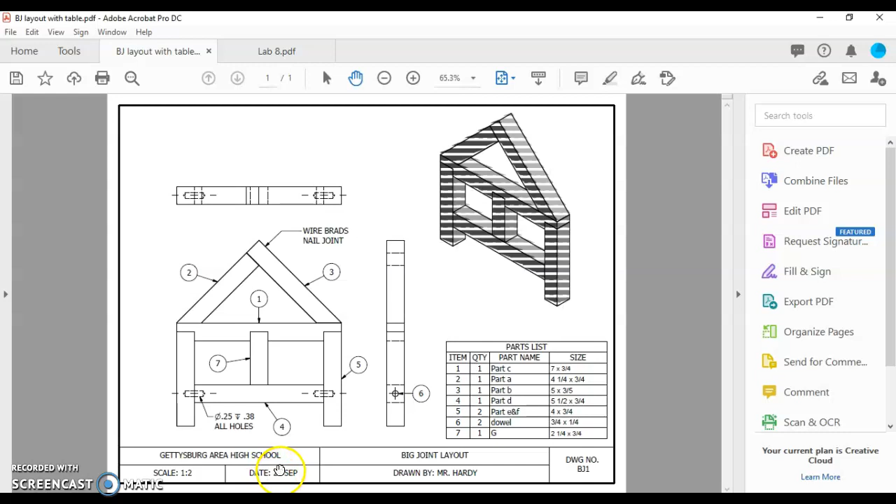So let's launch AutoCAD. Bring up your bird house, bring up your size A title block template, and get into the model space to begin the drawing. I'm going to just draw next to this one and duplicate what we see over here.

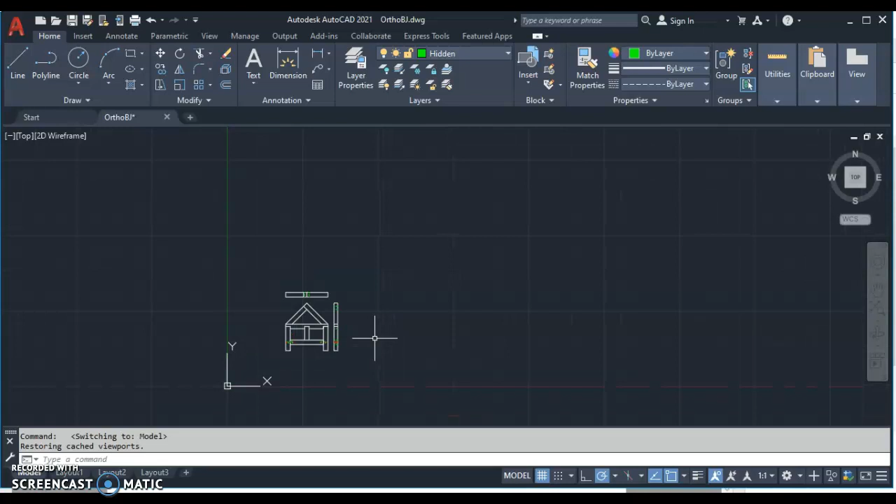There are a couple ways of approaching this problem. You find the tools that you are most comfortable with. You can either draw polygons or you can draw lines, whichever one works for you. It is important, though, that you use the correct measurements and you don't just simply eyeball this on the grid on the screen here. As I zoom in, that grid is going to change in perspective and size, and it's important that when I draw my objects, that they are the exact dimensions that they need to be.

So let's start by drawing with lines. Now I want to start in the object visible layer, so we'll check the object viz layer. We're going to pick the line tool here, and I'm just going to start drawing a point here.

And I know that this outside part is 4 inches high, so I click, I'll pull up, I'll type the number 4. Okay, I'll come across - I know that's 3/4, 0.75. I'll come back down the number 4.

Now I'm going to just show you a couple of things I do here. There's a little projection I can use, or I can type in the number 4. So all I had done there was moused over that endpoint and clicked.

And so I have my first part, and that was drawn with lines. Alternatively, I can also draw with a rectangle, and I'll show you how to do that on the other side. Let's put a 7-inch rectangle in right here, and I'll show you how to do a little bit of moving.

So we're going to choose a rectangle tool, and I'm going to specify that point to be right here, and I'm going to actually pull this down. This part is going to be 7 long. I'll hit tab and make it 0.75 tall. This drew a polygon here. It's not exactly placed properly, but it is in a general area where I can work with.

Now let's actually move this polygon. So I'm going to use the move tool. Select the move tool up here - it says select my objects. Let's choose that polygon. I'll hit enter, and it says specify base point. Well, I'll use the geometric center. I could use any point on here, but I'm going to select that geometric center, and I know that this has to go straight up a distance of 3/8, which happens to be halfway up there.

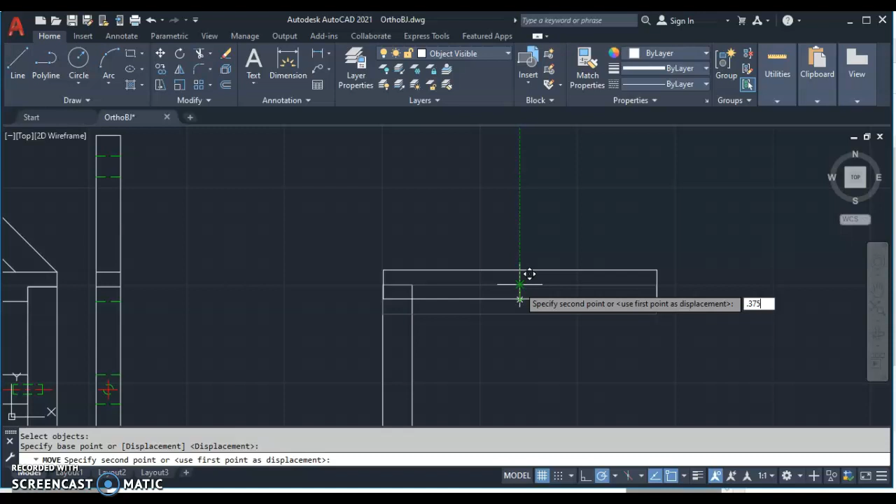And I don't know if you guys can see that, but it kind of locks at the top exactly. Now I could type in the 0.375 - you also see it appear on the screen out there, but we can type in 0.375, and we know we have that exact movement, or I could accept the lock. And I hit enter, and there it is. That has moved in. How do I clean this up here?

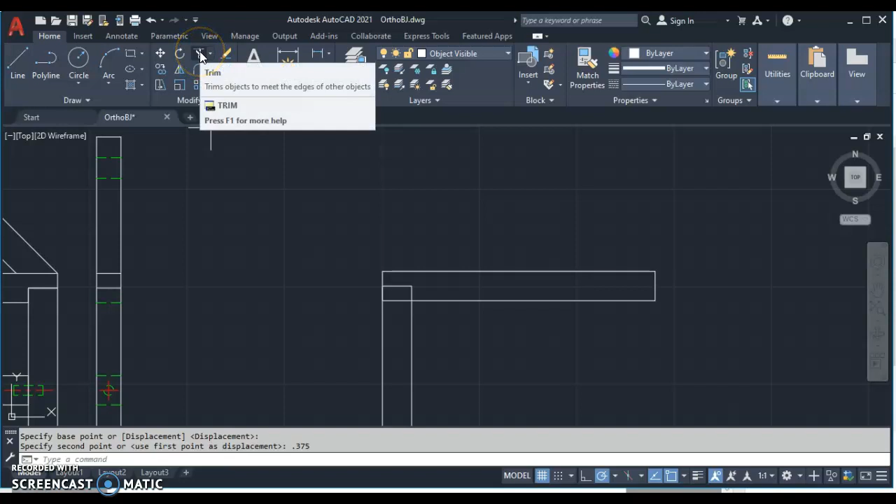This is going to be our little rabbet cutout there, and I need to trim this out of here. Very simple solution - we're going to use the trim tool, and we can trim this back. So in the modify menu, there's a pair of scissors, that's the trim tool. It says select the objects you want to trim. So you see, as I mouse over here, it trims out or cuts away the things that I want to cut back. So I'm going to trim those 2 lines out of there, and then I hit escape. And there's my part - very simple way of doing it using a polygon tool.

And you may find that the polygon tool is a much faster way of doing this. We can do the same thing on this side. In fact, you can use the polygon tool on this side, or if you like, you can mirror these lines right here.

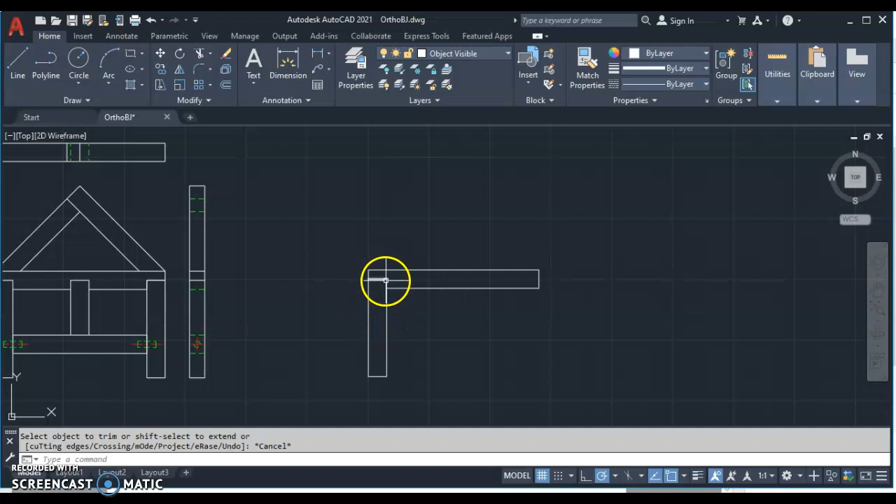So let's show you how mirror works. Pretty cool tool. I'm going to take this line, and this line, and this line, and this line. We're selecting those lines, and we're going to go up here to modify.

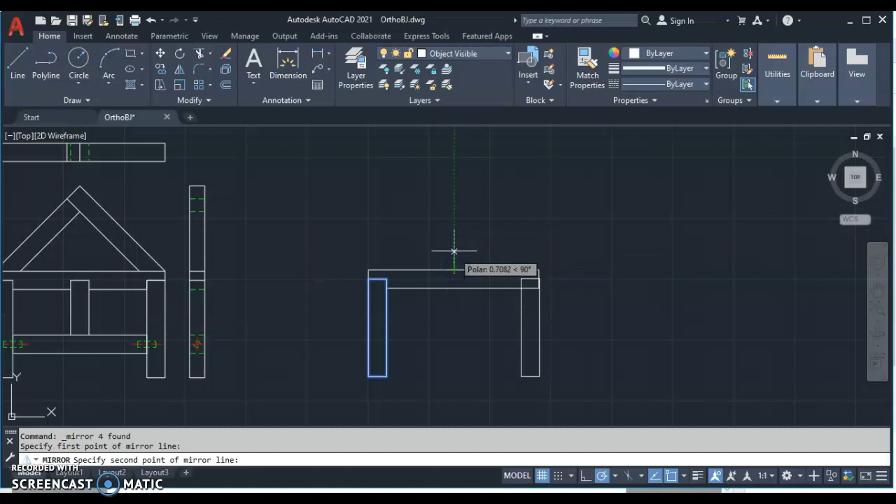We're going to use the mirror command. So I select mirror. Now this is very important to get this right: our mirror line has to be in the middle of the top point there. My midpoint was turned on, so you see that midpoint there, that little triangle. I'm going to select there, and I'm just going to pull up. And as I pull up, you see it mirrors my part right into place, snapping right in there.

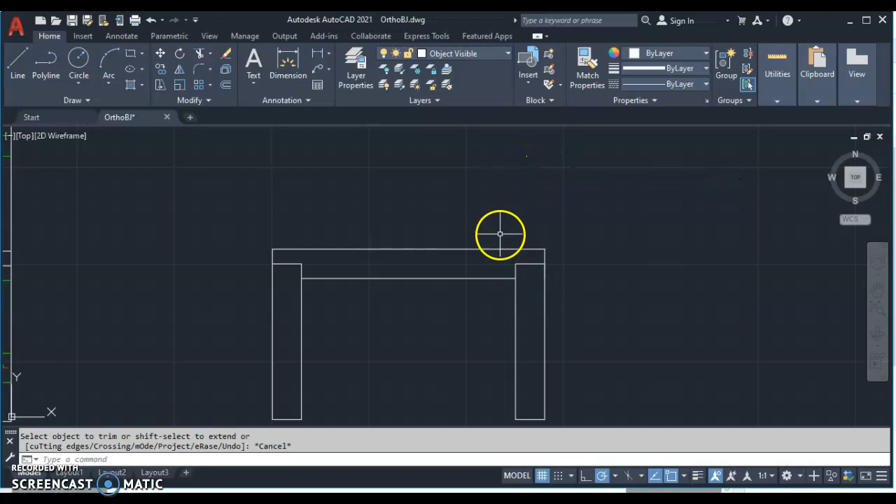Pretty neat tool. Do I want to erase the source? No, I do not. Okay, now I'm ready to trim this one up. So you can save and do your trim after you do your mirror there. Then you can trim both parts at the same time. You see how that part just cleans up there.

So here we are in the base of our front view. We know that we have a rectangle that has to come into this midsection. It actually starts 1 inch up from the end of this. So if I want, I can either draw it with lines or I can use the rectangle tool.

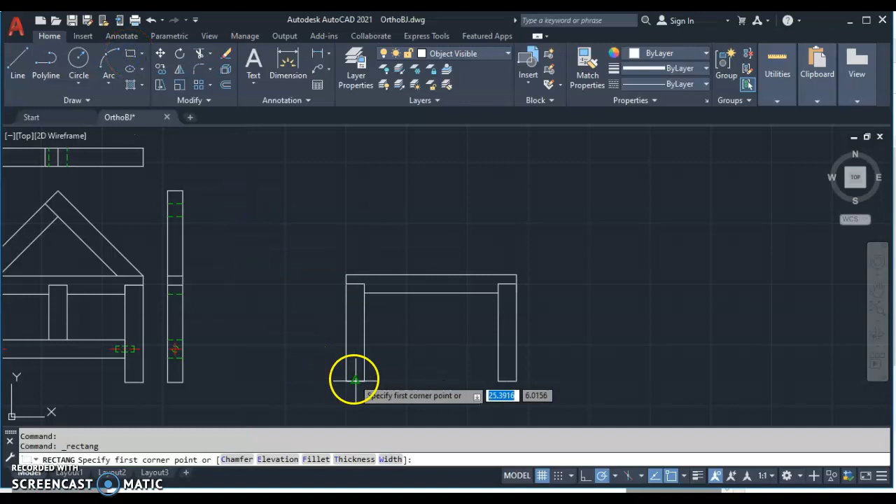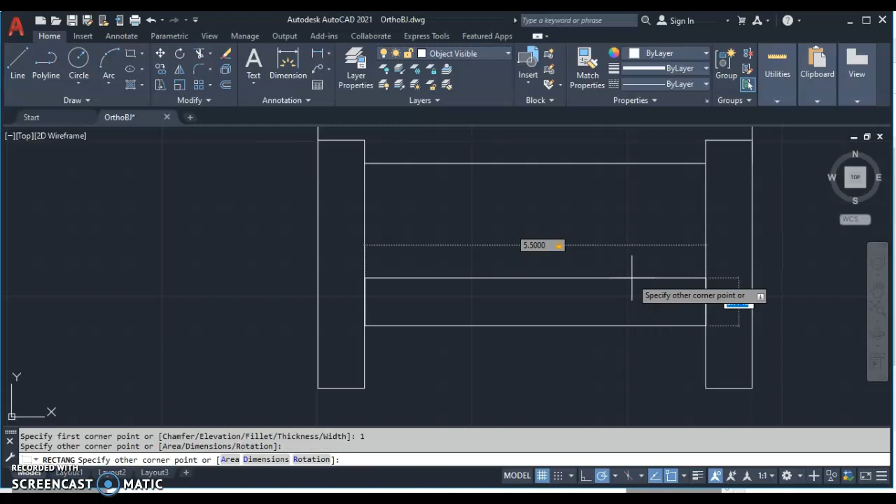And it says, hey, where's your first point? Well, my first point is going to be 1 inch up from here. So I'm going to mouse over the end and pull up to get that extension. I know it's 1 inch from there, so I type in 1. Then I can pull out. So I'm 1 inch up. I can pull out. It says, how long is this thing? It's 5.5 long. I hit tab, not enter, and I specify my 3/4, 0.75, enter. That's one way of putting that line in there.

You can use a reference and extension to draw that. There's a lot of different ways of placing it. It is important, though, that you properly place that line.

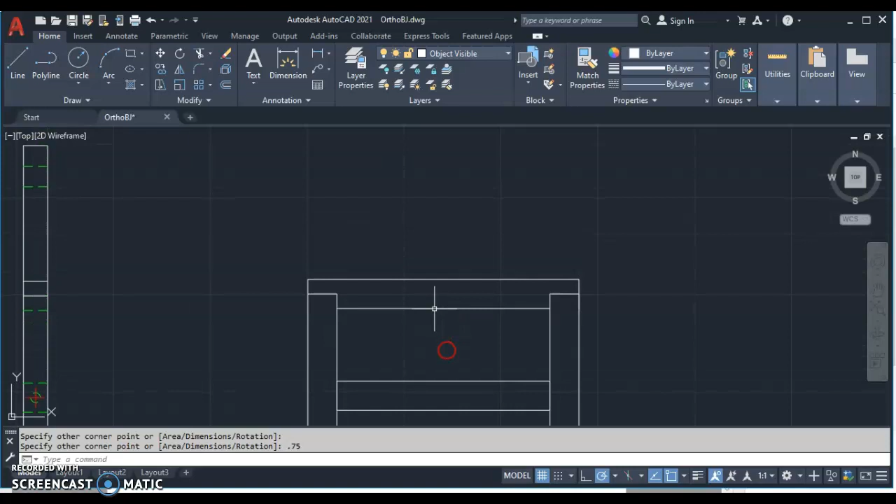Now, let's focus on the roof line up here. A couple things about the roof line. CAD is a very exact tool. And because it is so exact, the measurements that you got with your 16th inch ruler aren't going to quite agree as we set things in place here. I'll show you what that looks like.

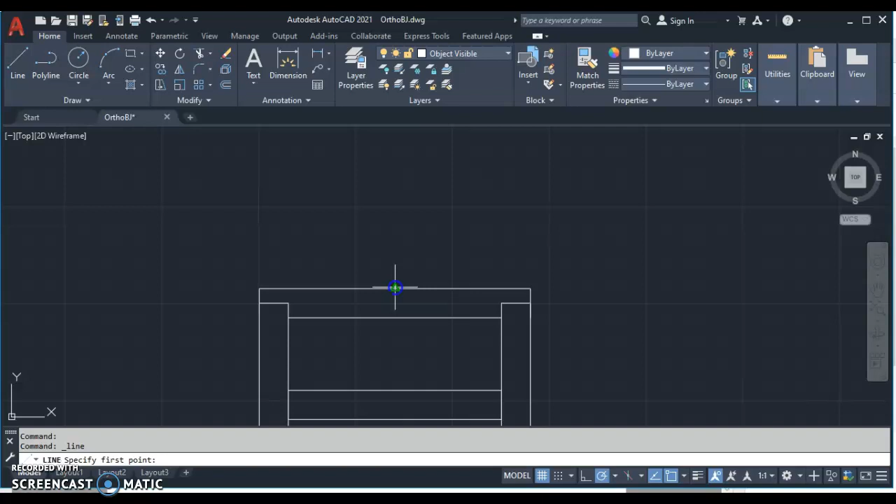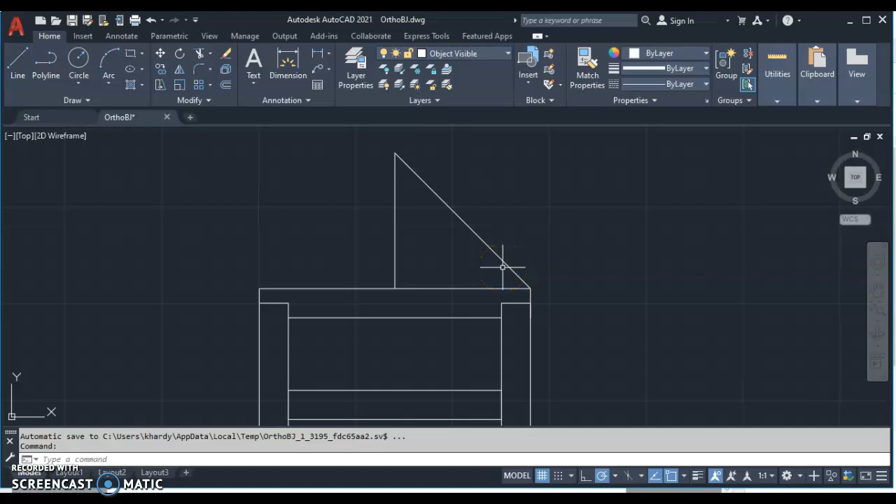In drawing our roof line, let's start with a construction line of sorts. We're going to start at the midpoint here, and we're going to draw a line that is 3.5 up, because our part there was 7 inches. Half of 7 inches, the span is 7 inches, so to the center of that is the run, and that is exactly middle here. Because we have a 45-degree angle that we're working with, we're going to rise 3.5. Since we run over 3.5, we rise 3.5. And I do my outside line here.

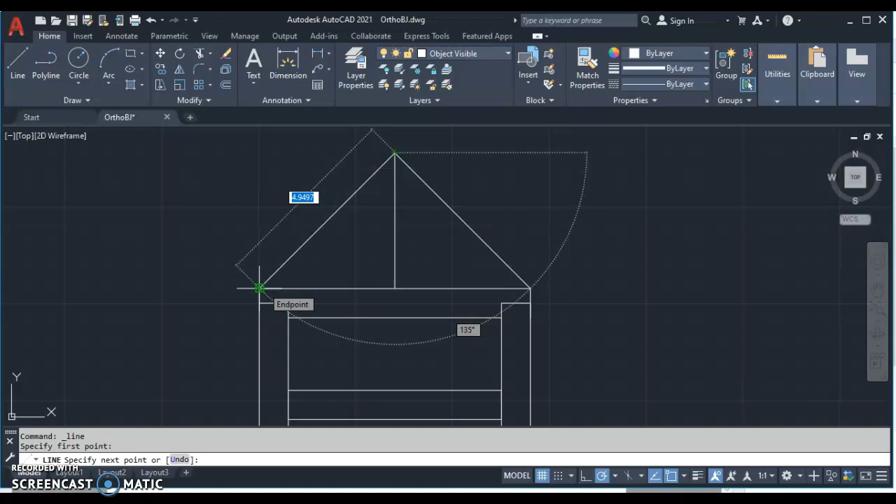Now notice I'm not taking the approach of drawing this as a rectangle. Instead, I'm using lines here, okay? And the reason I'm doing this is I want to point out that the distance there is not exactly 5. It's 4.9497. And that has to do with precision and accuracy.

So before I continue here, I'm going to pop a few things up here. We're going to pull a calculator up and just show you exactly how this works. Now, with the calculator tool here, you can see that the hypotenuse is actually 4.94974746830583. Why did I get that number?

Well, if I took A squared, 3.5, so I take 3.5 and square it, that's 12.25. A squared plus B squared, so multiply that times 2, is 24.5. And then I take the square root of that 24.5. A squared plus B squared equals C squared. Let's find the square root of C squared. So the square root of that is 4.9497.

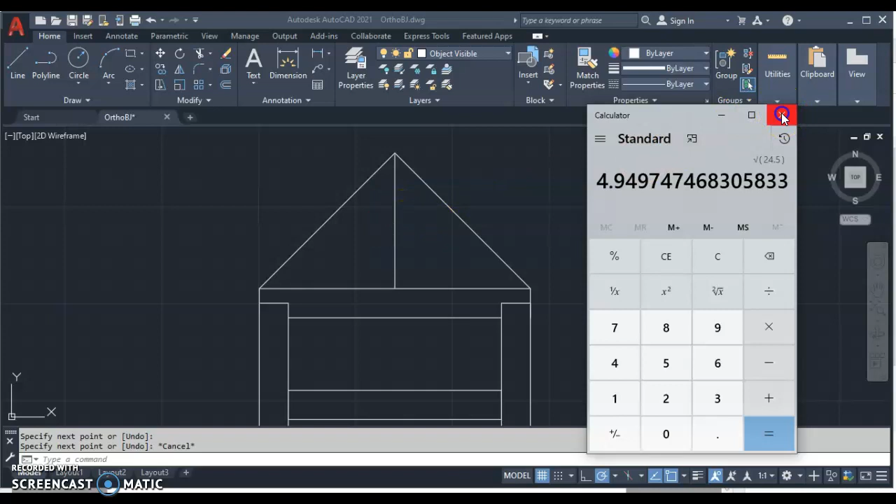Now, as we continue in our drawing, let's do our offset over here. We're going to use the offset command of 3/4. So I choose offset, and it says specify my offset distance. It's going to be 0.75. And what do I want to offset? I'm going to offset this line, and I'm going to bring it down this way.

Okay, I can also offset this line and bring it down this way. That draws my two parts for part A and part B, and now all I use is trim.

Select trim there, and you can start to cut out the parts that you don't need. Just trimming these out.

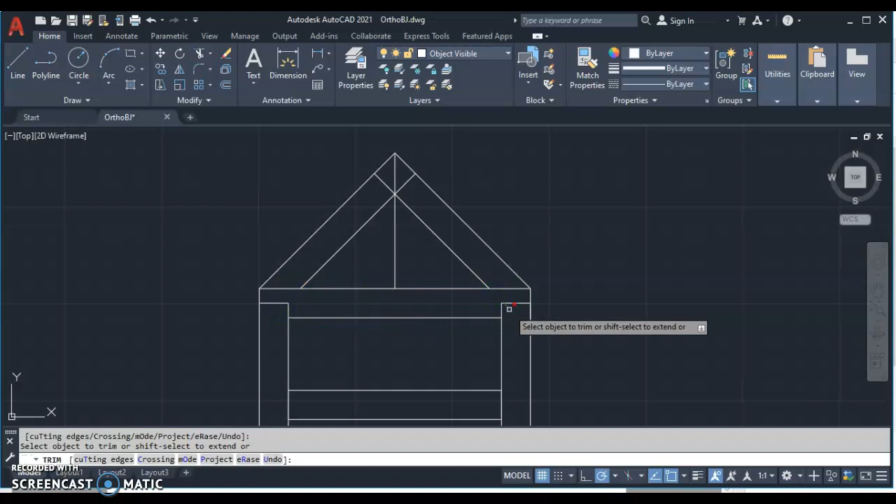You're not going to use this, and you're not going to use this. We'll just delete this here in a minute. So hit escape, go ahead and take that, and hit delete.

Now you have your front view drawn in. I still need this part G located here.

A couple ways of doing this. If you like, you can—we'll just do this with a midpoint line here.

So I got my midpoint line. I'm going to come down line to line like that. I'm going to use this simply as a reference for the part that I'm going to draw here.

Let's do this one with offset as well. Since I'm going to use that as a midline, I'm going to offset this 3/8 of an inch, which is 0.375. Hit enter. What am I offsetting?

I'm offsetting this guy this way, and I'll offset this guy this way. Okay, now it's not exact, but so I have that part there.

Let's kind of clean this up a little. We still have a notch we have to put in there, and that notch lines up right here. So I need to extend this line, take this, and extend it out, and that extension is going to come out to this point.

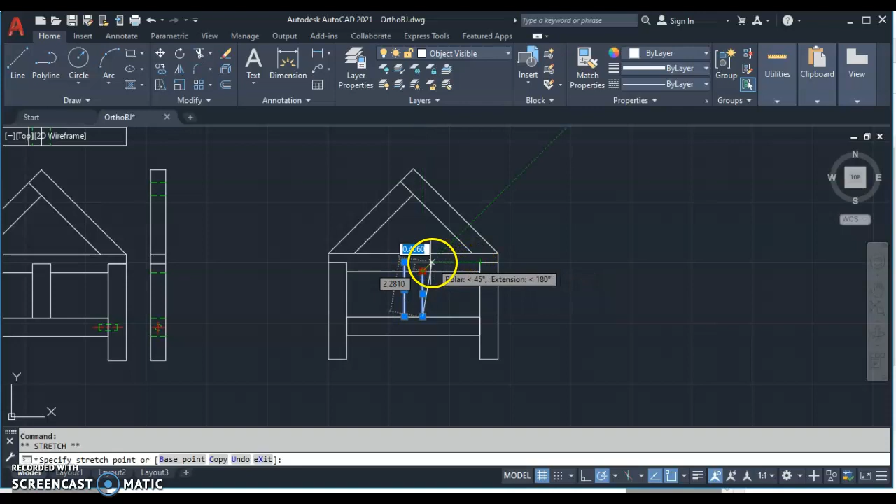See, I moused over the end there, and I got those green line projections. I'm going to do the same thing on this side. I need to extend this, and I can use that as a reference, come across, mouse over, and now all I have to do is draw a line to close this.

This is one of probably five different ways you can do this to create this. And then what do we do here? We use trim. Trim cleans that up. There's my front view, okay.

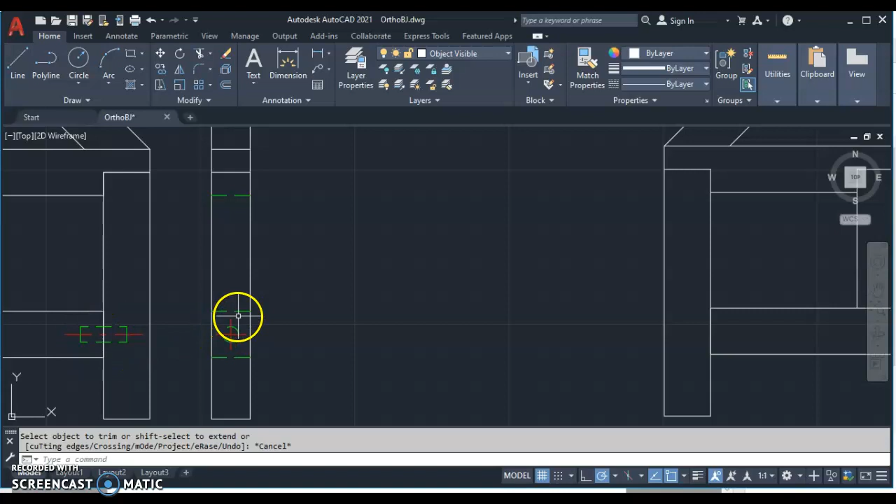In here, I have also shown my dowel rods, and I've shown the center lines in the dowel rods. I use the hidden line layer to draw those, and I use the center lines to show my center line marks.

Before I do that, though, I have to construct this rectangle out here to the side. So what I'm going to do is use the rectangle tool here, and mouse over the end point. I'm just going to start this, we'll say one inch away. So I'll type the number one inch away.

How tall am I going? Well, first of all, it's 3/4 wide, so I type 0.75. I'll hit tab and not enter.

And where am I ending? Well, I'm ending right here, and I can get that to line up. You see those green lines, those projection lines—just mouse over the tip there and line up.

They exactly line up as long as they're moused up and locked like that, or you can type in 7.875. Click that. Here I have my side view, and now all I'm going to do is project those lines that are visible and those lines that are hidden.

Actually, I'm going to do everything just with the line tool, and I'll go back in and move those ones that are hidden.

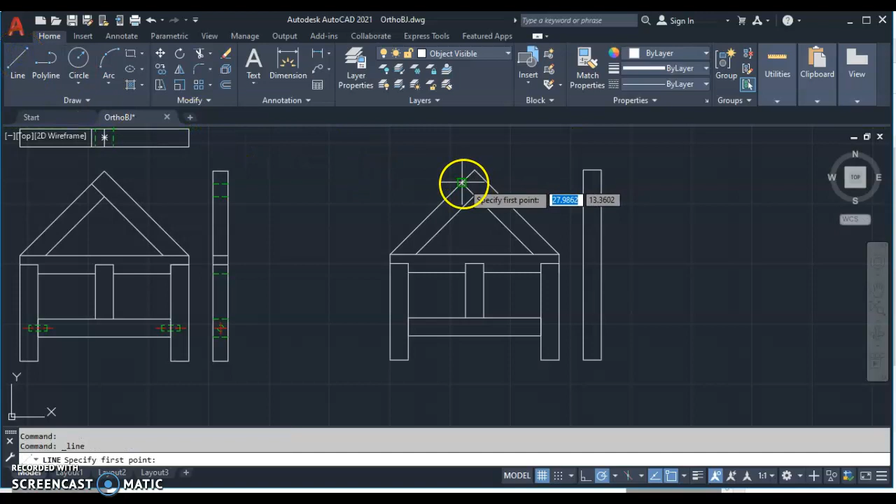So here, this line projects over. I didn't click anything, just moused over and pulled across, and boom, dropped that in place. Okay, do the same thing out here.

I want this line, which matches to this intersection right here. Pull it across, boom, line that up right in place.

Hit escape. Take these lines—they're actually object visible lines, they're just going to pull straight across. Escape, line, and again, one way of many. Pull it across, escape.

Just one way of doing this. Pull it across, escape, and we'll use our line tool to get this. This is actually going to be a hidden line, but we'll convert that here in a minute.

Pull this across, escape. Now let's think about what's not immediately visible, and what do we have to turn over to be hidden? Well, I have to turn over...

I have to convert this line. I'm going to convert this line and these two lines.

So I select all of them, come up here to your layers palette, and just turn them into hidden lines. They will become dotted lines for you when you do that.

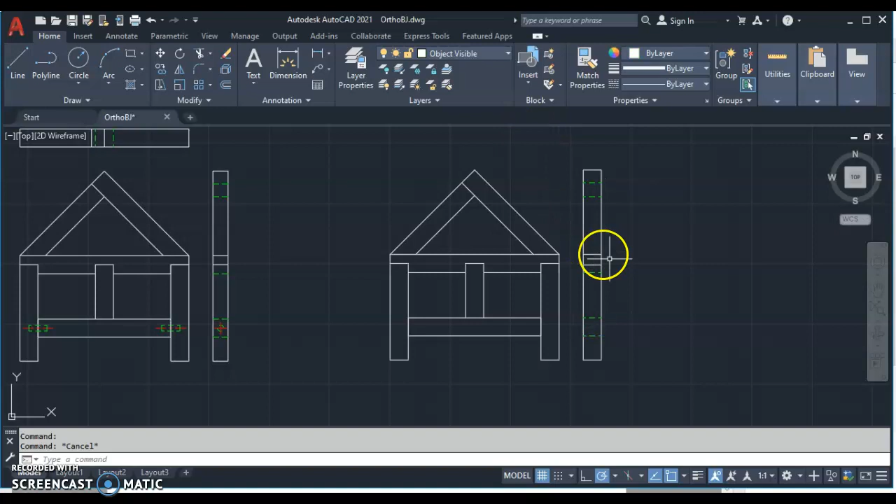Now between here, I need to show my circle. So I'm using the circle tool to show that hidden line.